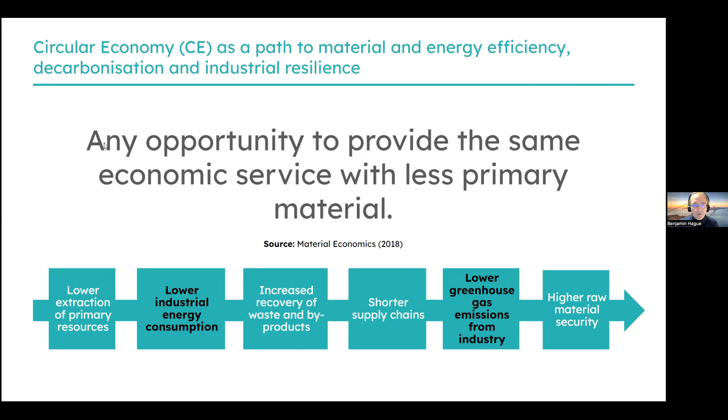So just to capture the focus of the work and the studies that typically look at this area. So the materials of interest, as I've mentioned, are steel, plastics, cement, and aluminium. Those account for roughly 2/3 of industrial emissions in the European Union, and then those materials in turn are consumed across, of course, a wide range of sectors, but about 60% of that demand or consumption of those materials falls into three key sectors: so construction, automotive, and packaging for plastics above all. So that's an obvious place to focus.

And then in terms of circular economy interventions, we're looking at three main aspects. And the order in which they're mentioned on this slide reflects the way we're looking at them today, or at least the order in which we're approaching them. From a strict cascading perspective, we should start really the other way around with circular business models. So in other words, how do we actually make products last longer? How can we actually use them to their fullest? How can we share them in different ways, or provide them as a service? So we actually need a lower stock of products or materials in the first place.

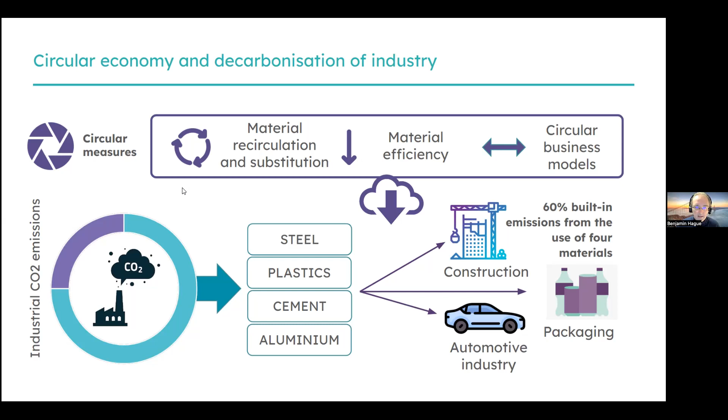But we're still in an era of continuing or even increasing production. So as we produce things, we're looking at ways to produce them with a lower material footprint. So we call that material efficiency. But most often talked about is the area of recycling or material recirculation, recovery of materials at the end of life, or their substitution by other lower carbon alternatives. So those are the three main strategies that come into play in this area in general.

So just to stay with that first one, just through the act of replacing a primary input with a secondary input in these four materials, and this is from, I think, also from Material Economics work, but in a study by Agora Industry from Germany from last year, it's clear that there's a very sharp drop in the carbon footprint of these materials as soon as we are able to use recycled alternatives, anywhere up to 95% in the case of aluminium.

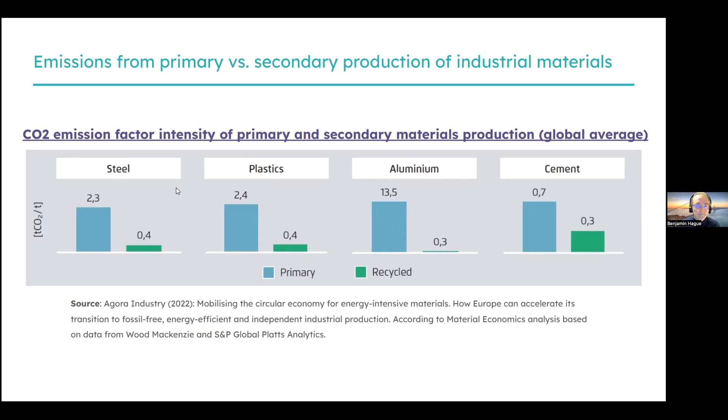And then this is one scenario among many which exist, and it's a relatively conservative one. This was also from the same study by Agora, where they totaled up the calculated effects of circular economy interventions across the four materials and across the three downstream sectors. And they came with a figure by 2050 of around 240 million tons, which roughly equates to something over 40% of the potential reduction in total emissions to get to net zero by 2050, assuming we have a similar carbon footprint from these sectors by the mid-century. And most scenarios don't seem to assume a major growth in the overall pie.

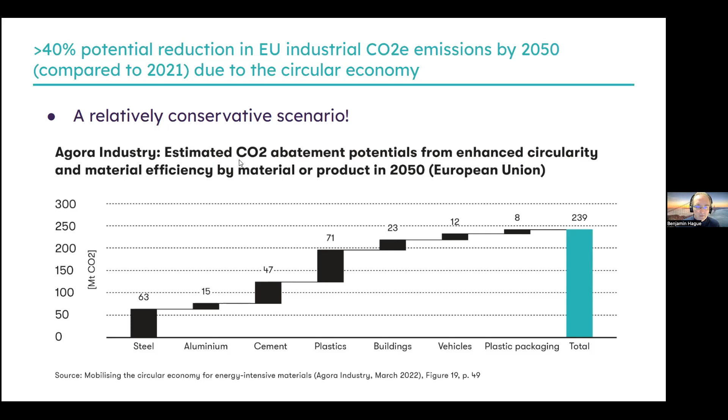So coming to our phase two, what did we decide to focus on? Well, in some ways, we've focused on the lower hanging fruit because they happen to be the largest pieces of fruit at the moment. So steel, maximizing secondary steel production and consumption. As we'll see, particularly in the context of the Czech Republic, there's a massive opportunity there. Cement and concrete is a complex picture, but on the material side, reducing the clinker ratio in cement, and indirectly also in concrete through how we use cement in concrete, we can achieve significant savings there.

In plastics, which I won't cover in this presentation, but we will also be putting out a piece on that, we're looking beyond mechanical recycling, which is the clear starting point, at supplementary approaches to decarbonizing in plastics, so chemical recycling, bioplastics. And then in buildings and vehicles, the first port of call is how we can slow material flows through circular design and extending service life. So rather than looking again at the recycling route, which is also important, it's how we can really keep those assets as a whole in use, or at least adapt or modernize them, or at least recover as fully as possible for reuse the materials and the components that are within them.

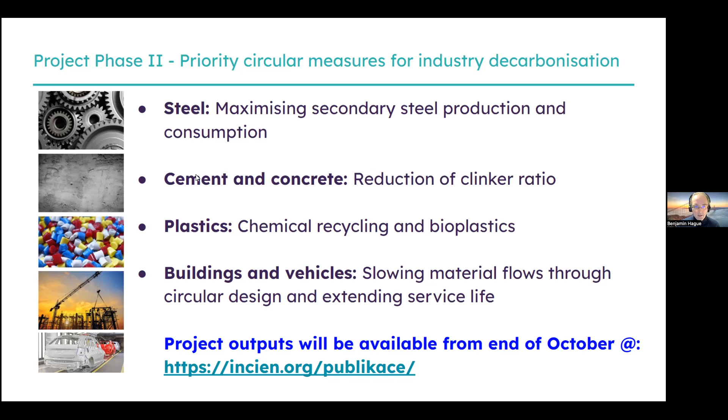Okay, so just to move into steel. With steel, the focus here is on how we can use secondary production of steel or recycling of steel to reduce the footprint. So what is the footprint? The footprint is very significant for a single industry. It's about 7% of global CO2 emissions from man-made activities. It's slightly lower in the EU, but in the Czech Republic, we have two main steelworks, and they both currently are based on primary production, so using blast furnaces, and it's close to 8% of the national emissions just from those steelworks currently.

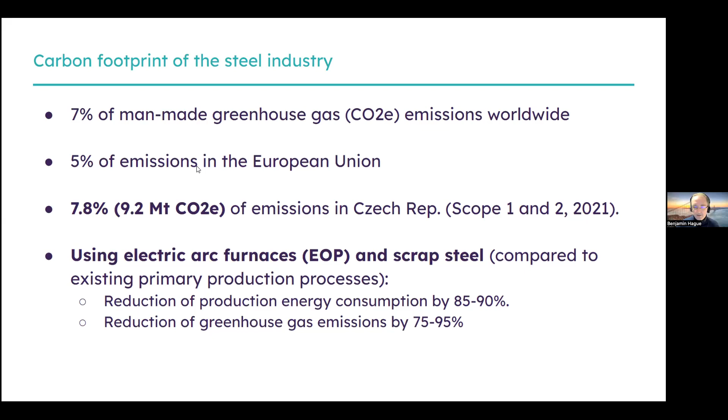Or as of 2021, if we include both Scope 1 and Scope 2 emissions. So that would also include the electricity consumption, which I think we need to do because electricity is a major factor also in recycled steel production. But if we use electric arc furnaces, and this is obviously common worldwide based on scrap steel, then we can see reductions in primary energy consumption of 85 to 90%, and a fall in the carbon footprint of anywhere between 75 to 95%. It very much depends on the starting point of the specific steelworks, but it's a massive saving.

So that's in general. And then just to look at the Czech Republic as a case in point, as I mentioned, we have two main steelworks. Currently, as of 2021, just to take a year which was relatively higher in production, so perhaps slightly more representative of the historical trend, almost entirely primary production. By 2031, and of course there are a vast array of uncertainties as to what may happen between now and then, and even in the short term there are many uncertainties. Nevertheless, just based on looking at the plans of the two steelworks, what they've published in terms of investments and their scenarios, we see around 75% of the existing production moving to electric arc furnaces within the next 10 years.

And that will result, if it goes ahead, in an 80% reduction in the emission factor of crude steel, and around 7 million ton CO2 saving per year, which is, on total emissions today, about 6% of the national total. So just in these two facilities, there's a huge opportunity here to make major savings.

It does come, of course, with a fairly significant catch, which is that there's a 3.5 times increase in the demand for scrap to achieve that. So currently the steelworks use scrap mainly as an input for primary production as part of the raw material batch. If we reach these levels of production within 10 years on this technology mix, that's going to shoot up to about 5 million tons, and that's just in the Czech Republic.

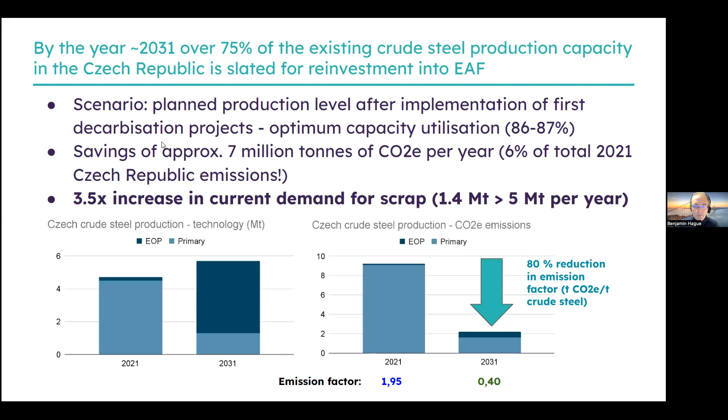If we look at surrounding countries, Slovakia, Poland, and other countries around Europe, of course, many other steelworks are also looking at these types of projects. Europe does currently have a surplus, in other words, exporting scrap outside of Europe, particularly to Turkey. But that's likely to disappear within the next 5 years, it's estimated. And so there's going to be quite a competition for the scrap as a strategic raw material.

So one approach that's been looked at there is to see how we can reduce exports from Europe. There are certain limitations on those sorts of approaches, but certainly within OECD countries, based on having common environmental criteria, audits, and so forth. But perhaps a more practical approach is to really see how we can better map steel scrap flows, so there's some view of the long-term availability for the different offtake producers, and a better visibility of the quality streams.

That's certainly true in the Czech Republic, where until now that's not really been that important as an input material for producing primary steel. Quality is not such a factor other than radiation levels, but it certainly will become a factor in future for some of the product mix.

And so it'll be important to look at how we can prevent more of that scrap falling into the waste regime, how we can in some ways professionalize the scrap market with more transparent data, guarantees of origin and so forth, and also better separation and tracking of those metal flows, or indeed flows of other materials in various manufacturing sectors. And that's going to be coming through from next year onwards through the ecodesign regulation, concepts of design for disassembly, digital product passports. So that all is coming, but it's still early days as to how exactly that's going to be implemented.

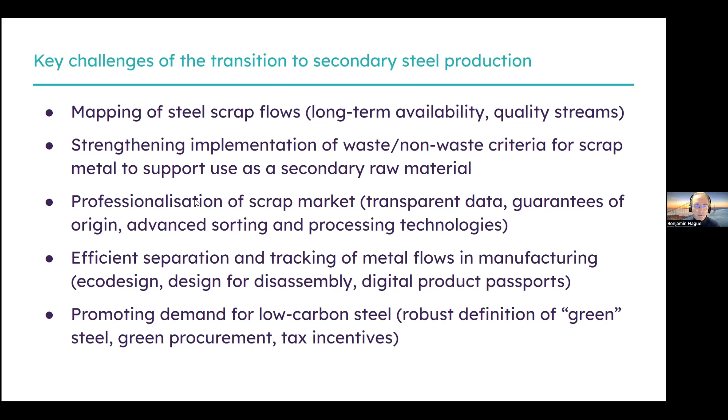And then another key factor across all these sectors is demand for low carbon steel, in particular through the use of green public procurement, which is still a rather undeveloped area for industrial materials. So that's on steel. If we look now at cement and concrete, it's again a similar challenge in terms of the decarbonisation targets, but a rather different beast in terms of what's required to get there.

So we're looking here at the main culprit, in a word, which is clinker. So we shouldn't be too hard on clinker. Of course, clinker is what makes cement work. Cement's a vital material for building infrastructure for modern civilization, we could say. But the challenge is that clinker is, although it's only a small proportion of the final typical concrete in terms of ton of concrete.

In fact, cement is about 15% of concrete mix on average. Of course, it varies a great deal depending on the type. The footprint, or the carbon footprint, is 90% coming from clinker, at least in a typical case, the standard cement. So it seems obvious that from a material point of view, reducing the clinker ratio is a very difficult thing to manage, but it's the main tool we have, other than technological options, carbon capture, use and storage, which of course is a major strategy being looked at in this sector in particular.

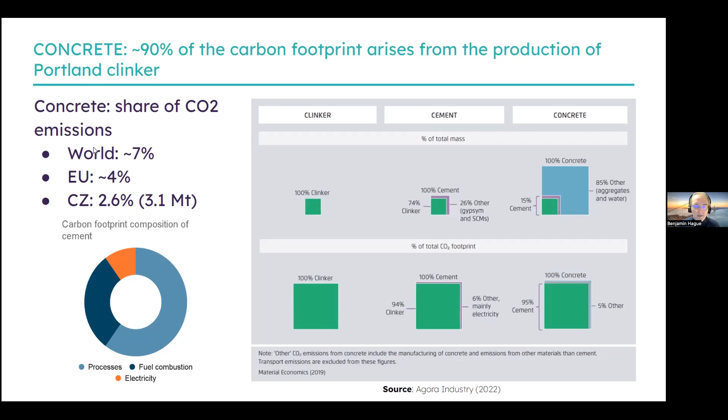But concrete has a similar share of world CO2 emissions, about 7%, slightly lower in the EU. In Czech Republic, it's a smaller sector, but cement production tends to be more domestic market oriented because of transportation costs and so forth. So it's around 3%. So for that reason, we're looking at the impact more on an EU level here as to what is the contribution.

We call it circular economy here. Strictly speaking, we're really talking about material-related measures. So some of the materials which could be used to replace clinker are also primary materials like calcined clays and so forth. But it's different from the typical decarbonisation agenda where we're looking at energy efficiency or other kinds of process technologies, or carbon capture, use and storage, or the use of renewables, obviously, to decarbonize electricity. In these sectors, the material solutions are a major part of the solution.

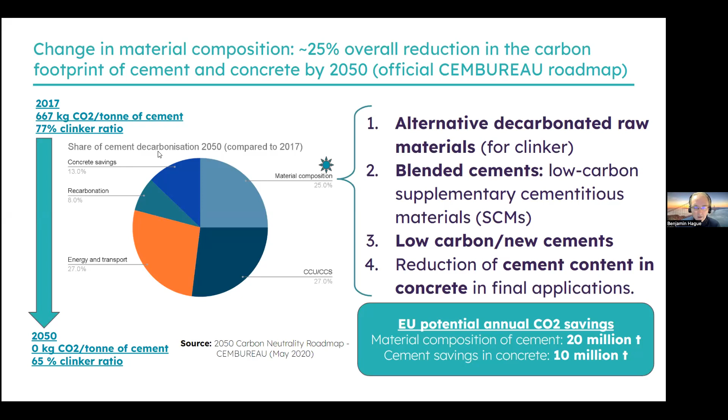So the buildup of these four measures gives us about 25% savings. And if we look at that on an EU level, then we combine cement side savings, about 20 million tons, and also cement savings in concrete. The total is about 30 million tons of CO2. This slide shows us a, excuse me, sorry.

Take your time, Ben. Yeah, no worries. Yeah. Autumnal. It's a complex topic, so. Yes, it's choking me up, as you can see.

Yeah, so this is a scenario from a report which was developed for the Alliance for Low Carbon Cement and Concrete. So they're looking at this issue of clinker ratio very directly and in detail. And it's probably fair to say this is more of a top-down view of what would be the additional CO2 savings if we were to achieve even lower clinker to cement ratios than is assumed in the Cembureau roadmap. Cembureau assumes a reduction from 77% today to around 65% in 2050. Here we're looking at the possibility of driving that down to 60, 50, or even 40%.

Now, to some in the industry, that might seem like science fiction. And maybe it is. I'm not here to say what's possible. But we're also talking about an evolution over a time frame of 25 to 30 years. And there are many, many different technology options under development. So we should be a little careful not to write off these more ambitious scenarios just based on today's knowledge or today's view of what might be possible.

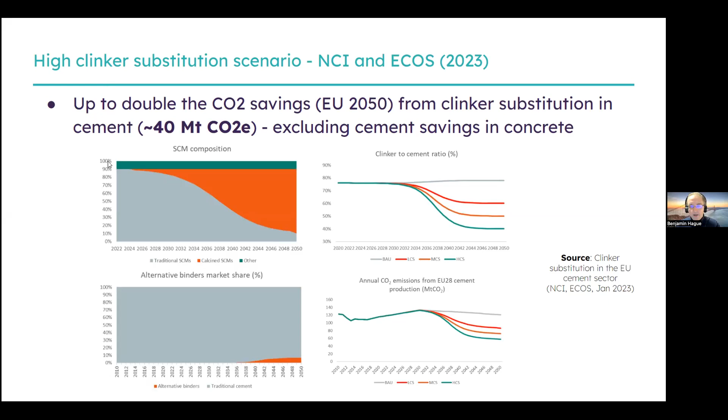limestone. The alternative binders that I mentioned, so alternatives to clinker itself, we can see that even in the long term, there's not more than a 5 to 7% share foreseen for those. But a combination of these factors and driving down that ratio could potentially give us some very significant savings. Again, with cement or concrete, there's a number of issues which are being actively worked on in the industry. So one is the availability of these alternative raw materials, which I've mentioned.

There's some more limited scope for the use of concrete fines from recycling of concrete as an input material, and standards do allow that now, but it's still a relatively limited potential. So for that, or for the use of more rough fractions in recycled concrete, then of course pre-demolition audit, selective demolition techniques, and higher use of recycled construction and demolition waste will be important. Then the standards themselves are currently based on compositions rather than performance-based parameters.

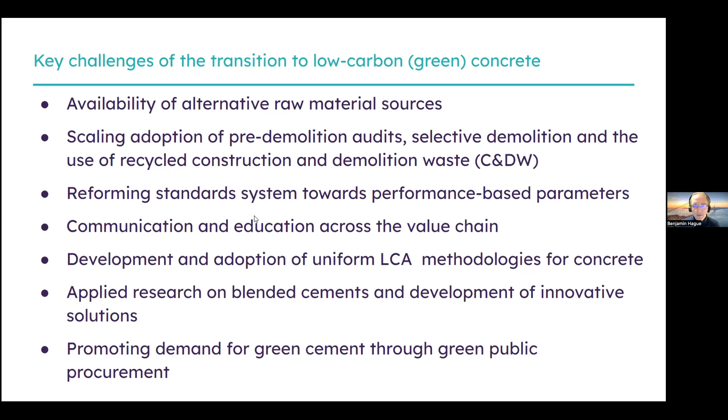I think the major message coming out of the sector is communication and education across the value chain about the complexities of using different types of cement with lower carbon footprint, but also the opportunities. And for that, we need better methodologies to measure the footprint, LCA methodologies. We need obviously long-term research, and again, we need to accelerate work on green public procurement. And then finally, I'll just mention some principles we've looked at in buildings and construction, but I'll let the speakers that follow comment more on this.

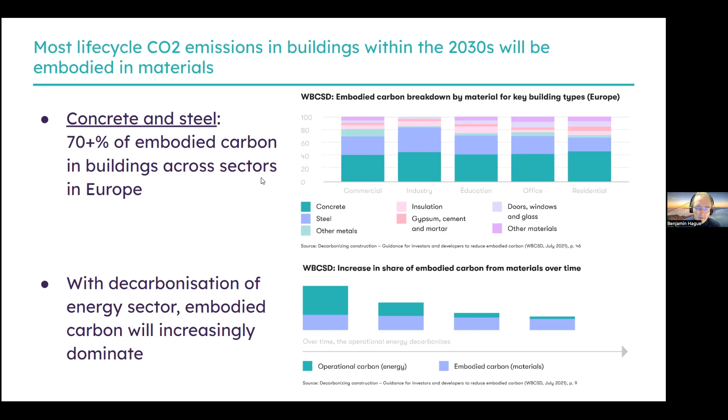So what we've looked at here is the range of strategies which can help us to reduce embodied carbon in buildings, and the clear message from all the various roadmaps, strategies and reports out there is the number one thing we need to look at first is how do we best make use of existing and future construction. So first of all, can we avoid construction by other means? I won't get into that, but that's almost like, do we need to build this, or do we need to look at how we plan cities differently?

Reducing construction by optimizing the utilization rates of buildings. So that can range anywhere from auditing, mapping, and then incentivizing through various fiscal instruments, utilization of unused building space, to, well, it gets into the range of social engineering, so we won't go there yet. But there's certainly opportunities to rationalize building space use, and then very importantly, renovating rather than replacing. It's clear that some buildings reach the end of a kind of moral lifespan, and so the best thing to do is to demolish, ideally deconstruct, and we'll hear about that from Skanska in a moment. But renovation over new build is a key strategy.

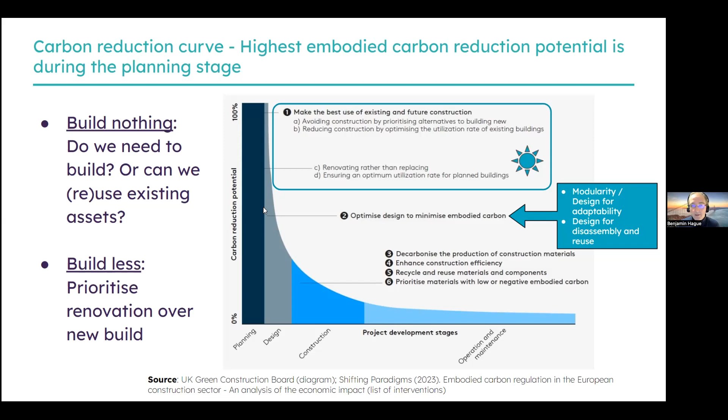And insofar as we're building new, we need to be planning for the end of life phase of those buildings now, by trying to design them with modular principles in mind, designing them for adaptability so they can be repurposed later, or for disassembly and reuse later. And just at the very end here, to give you a quick view, this is one study that was done about a year ago by the EEA, the European Environment Agency, and Metabolic. It was basically looking at how we can take the renovation wave, which is focused on deep energy renovations for buildings in the European Union, and apply circular principles to that.

So this is an example of a study that's been done, but we'll be continuing to work ourselves on this area to see how we can achieve a better connection between the renovation wave or the renovation drive and circular measures to also build in embodied carbon and whole life carbon into that process.

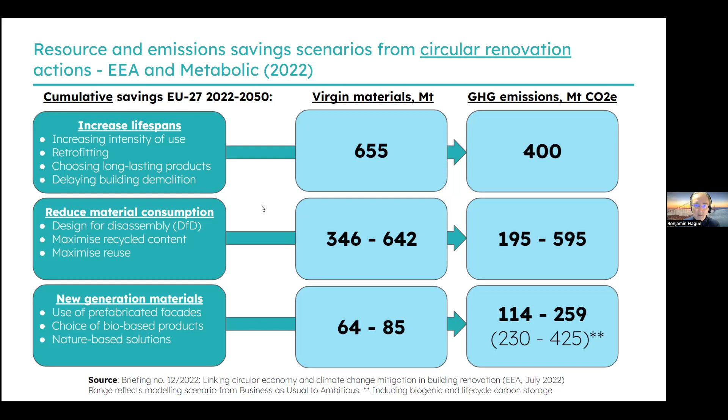And then just one last thing to mention at the end is we also have a project we're working on called BUS-GoCircular, because it's clear from this transition, although there's a wide range of skills for energy transformation or energy optimization of buildings, circular construction skills are still a new thing.

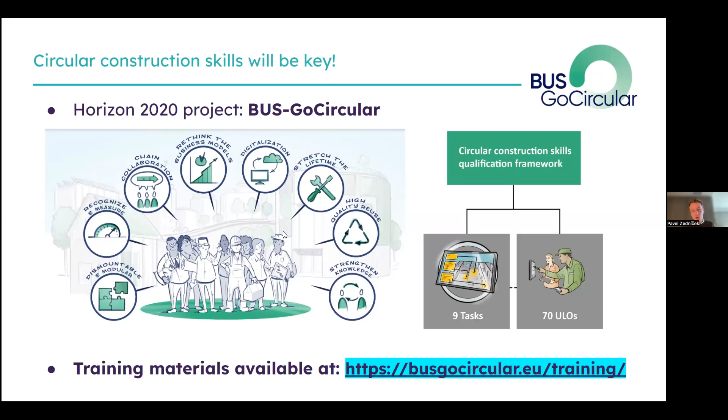I'm really glad that you mentioned at the end of the presentation that there are many other circular economy opportunities that we haven't covered, right? Because both in steel and cement, the focus and the scope we have chosen is quite specific because we want it to be specific. We didn't want it to be all over the place. But on the other hand, again, there are many other circular economy measures that are in place and that we can actually impact. And that's also more in our previous study.

So from this angle, would you say that one has to really prioritize in order to not get lost in circular economy because it is so complex, and that also the complexity then mirrors in sometimes lacking policy to support this transition? Well, I think you make a good point that there's a risk in cherry picking certain things from the whole piece that then you don't see things in the full context or see all the possibilities.

So the reason we've done this is because we wanted to focus on some major themes, some major areas of opportunity, and try to identify what's the current state of play, what are the roadblocks, and what are the areas that need to be worked on to develop enabling policies for those. But it's fair to say that in particular in the construction sector, there's no lack. In some ways, there's an overabundance now of very good quality materials, roadmaps, kind of playbooks, handbooks of various kinds, which document the whole array of different interventions.

I think what we're trying to make the point is, it's important on the industry side to decarbonize the materials themselves. But as we saw, particularly in cement, that's a long-term process. In steel, it's great that if we do make this transition to secondary steel, we can do a large part of that within the next 10 years.